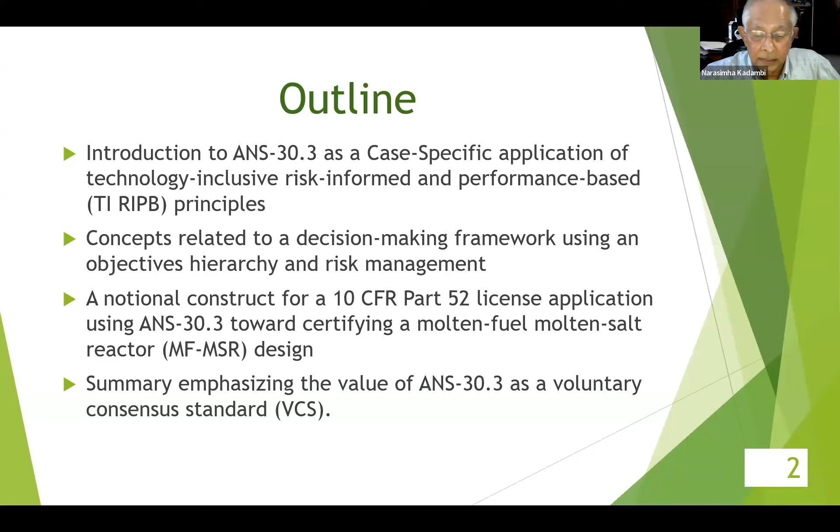So ANS 30.3 is a voluntary consensus standard in the traditional sense that it has requirements. What is different is that the requirements in the standard are explicitly risk-informed and performance-based. And this distinguishes it in terms of applying it to light water reactors and especially new light water reactors.

This slide shows where these requirements are identified in the standard. They occur primarily in the sections shown at the bottom of the slide. But the emphasis is that this offers requirements that are considered to be a minimum set for each of the topic areas covered in the standard, and are to be applied through the whole design development process and phase.

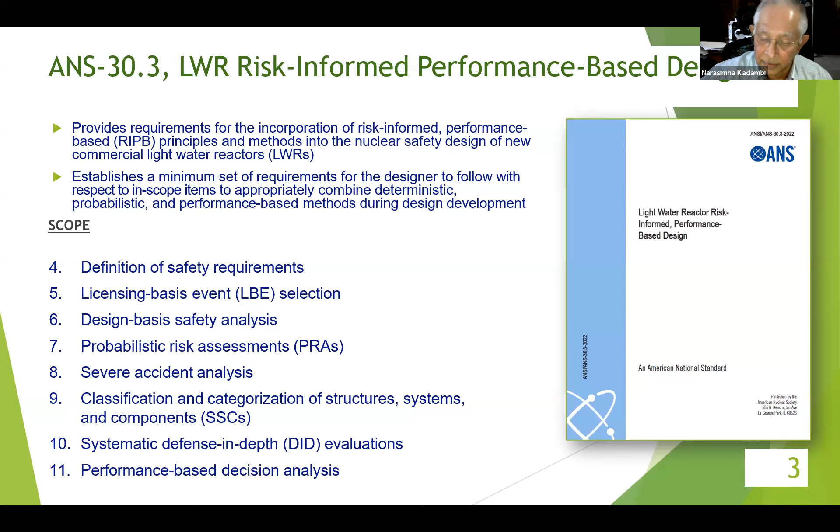So a key requirement of ANS 30.3 is that the user establish a decision analysis process. So why is that needed? Well, that's what it takes to identify technical alternatives, identify and evaluate alternative courses of action, record the preferences that are expressed in the various decisions that are taken, document the decision rationale and the assumptions that go into the decisions. So all this is spelled out in section 11 of the standard, performance-based decision making.

Now, the other sections are then implemented towards achieving nuclear licensing success based on this process that has been set up.

The decisions associated with use of the standard occur at various levels. The requirements are not all considered to be at the same level, but they occur at the project level, covering unique technologies of the project, the plant level design features, the site characteristics, and the whole project as a whole. The plant level design features would be a subset representing the nuclear steam supply system, the secondary side systems, the support systems, etc.

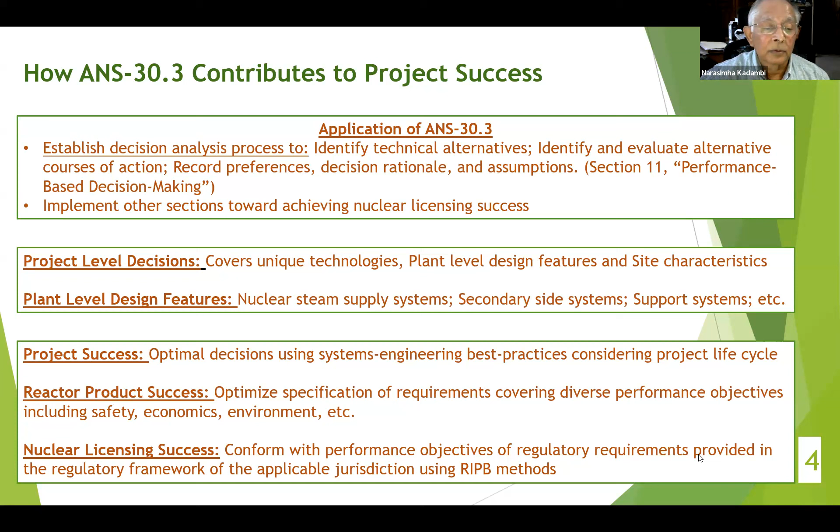A part of this project is the reactor product that is the central feature of this project. The reactor product itself is something where the requirements would optimize diverse performance objectives, including safety, economics, environment, etc. But in terms of the specific requirements in the standard, we are aiming for a subset directed towards nuclear licensing success. So what we are talking about is a flow down where you begin at the project level, go down to the plant level, then to the reactor product, and then to the licensing itself.

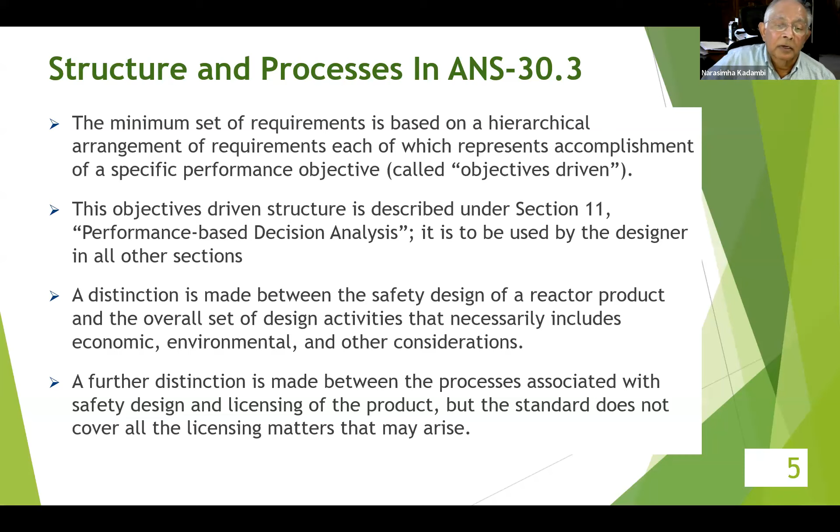The idea expressed here is that the regulations themselves offer plenty of flexibility. The current LWR licensing process used for the operating plants, the operating fleet, has demonstrated high levels of safety. But the way the regulations have been implemented, the general feeling is that it doesn't necessarily offer all that much flexibility.

I suggest that's because the way regulatory practice has evolved has made the implementation of the regulations really rather prescriptive. I think, as a result of a lot of rethinking about the effectiveness of our current regulatory framework, and the growing recognition of RIPB approaches, it is clear that for a lot of things now valued with the operating fleet, such as power uprates, license renewal, life extension, these RIPB approaches can offer significant economic benefits. In fact, last year in August of 2023, Lana Lawrence of INL made a presentation identifying such opportunities. But really, the flexibility of the regulations, I think, can be used to maximum benefit with respect to non-light water reactor applications using regulatory modernization.

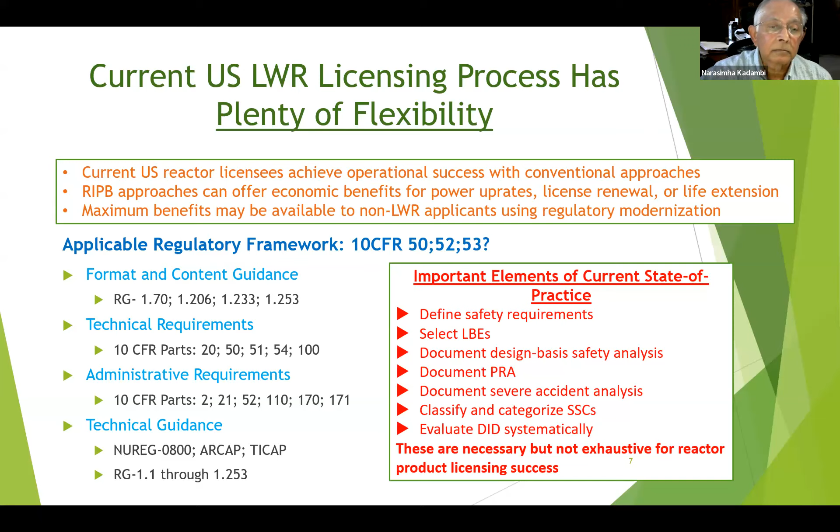The regulations themselves can be looked at in terms of the outcomes that they aim to accomplish. So one can look at the technology-inclusive outcome objectives for the licensing process. For example, implementing 10 CFR Part 50, right in the introduction, it says that the general design criteria are generally considered applicable to other types of nuclear power units.

And it was looked at that way at the beginning, but it evolved into being rather prescriptive in a number of areas. Now more recently...

The commission, as part of its reform process, issued a white paper, that is the SRM to SECY-98-144, where it directed the staff to consider risk-informed performance-based approaches and identified the high-level outcome objectives associated with success in implementing these approaches.

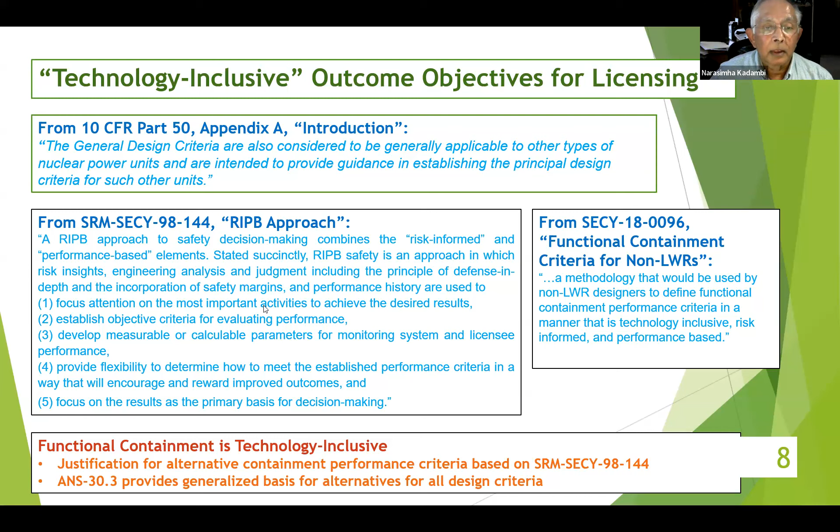Let's see, at this point I don't know if Kent Welter is on the line. I'm moving on to the next phase of this, but if Kent is on, I'd like to see if he has anything to say. Kent is the chair of the ANS 30.3 working group. As I say, I've prepared these slides representing the standard, and I'd like to give him an opportunity if he has any comments. But, okay, in terms of the questions in the chat, I'll try to get to them at the end.

Okay, moving on to the next segment of the presentation. This generalized architecture that I'm trying to describe offers requirements management using the objectives hierarchy concept. The requirements management part is really important because it's the process of documenting, analyzing, tracking, and verifying requirements, and that's a key part of implementing a systems engineering process.

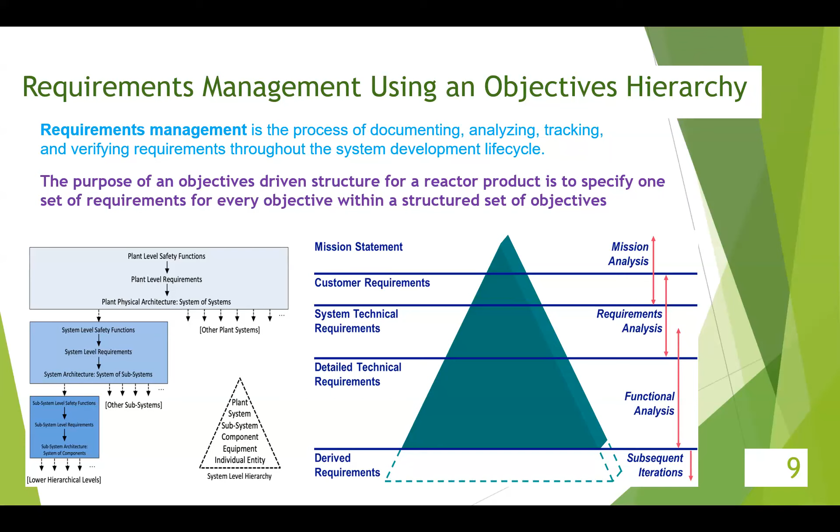Next slide. So the idea of having this hierarchy actually implies another factor that quite frequently is not very explicitly stated, and that is that there is a difference in the level of detail associated with the performance objectives in a requirements hierarchy. So this kind of structure of performance objectives is what I would call a framework.

And this is the decision-making framework that's an integral part of ANS-30.3. I would call any framework to be a representation of the relationships and dependencies among the specified elements. And in this case, what we are talking about are the performance objectives, representing the various aspects of the project and incorporated into this formal decision analysis process.

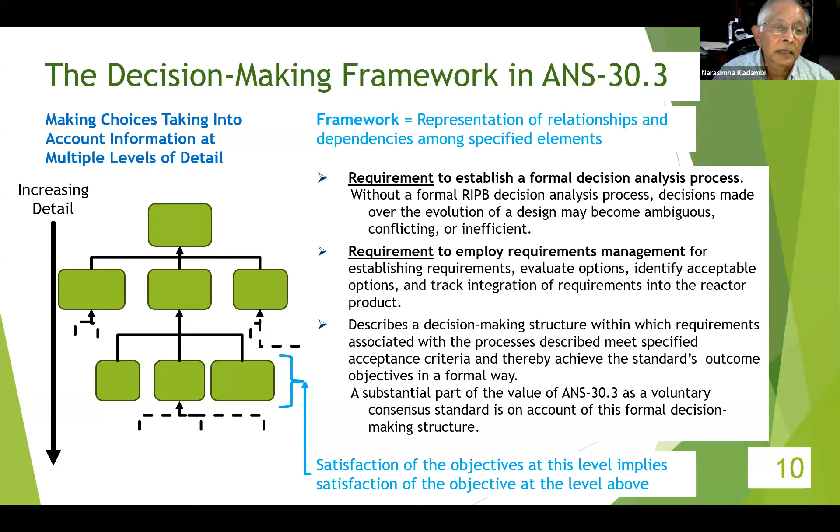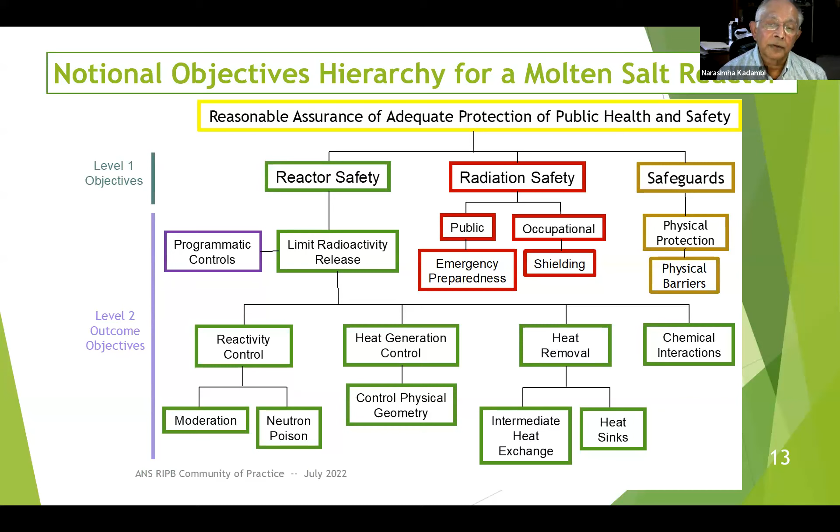This is just showing how the various elements of the framework we've been talking about can offer requirements to each of the boxes shown here, so that you can accomplish the higher level objectives of reactor safety, radiation safety, and safeguards. This can be done in a formal way and demonstrated for purposes of a safety case.

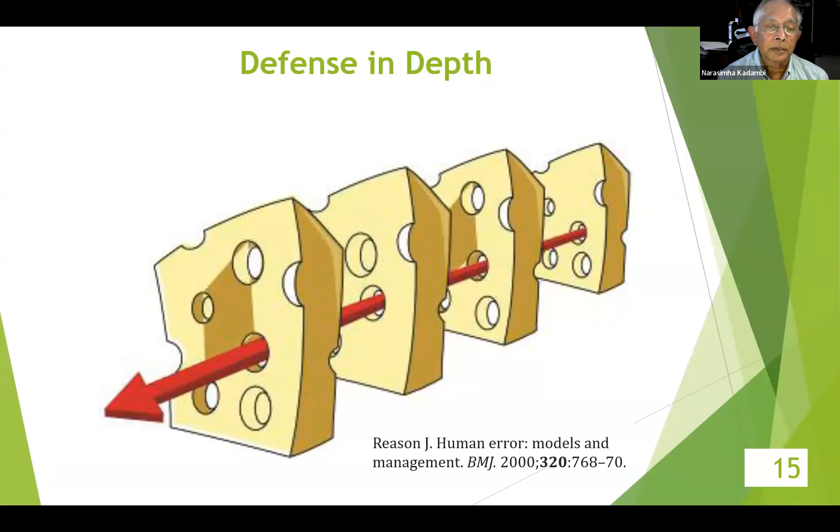Next slide. So this is again a pictorial of defense in depth. This has been used before, but the basic idea is that these levels of defense, or layers of defense, can be addressed using the structure provided in ANS 30.3. Next slide.

So in summary, ANSI ANS 30.3 is a voluntary consensus standard, and it is really able to address many significant needs relative to non-LWR applications, and can be used in the same way that many other standards developed by other standards developing organizations are used. It provides the architecture for a decision-making framework, and it can address input information at various levels of detail, depending on whether you're at the conceptual level or more mature design levels.

Now, the decision-making structures are connected, and I use the analogy of scaffolding to connect all the various pieces in a formal way, and keep track of all the decisions taken throughout the life of the project. As part of the performance-based approach, you can take account of the physical and temporal margins available to accomplish the performance objectives. The last point is that ANS 30.3 can really be a factor in claiming that progress has been made towards meeting the Nuclear Energy Innovation and Modernization Act, as well as the federal direction, with respect to using voluntary consensus standards in a performance-based manner.

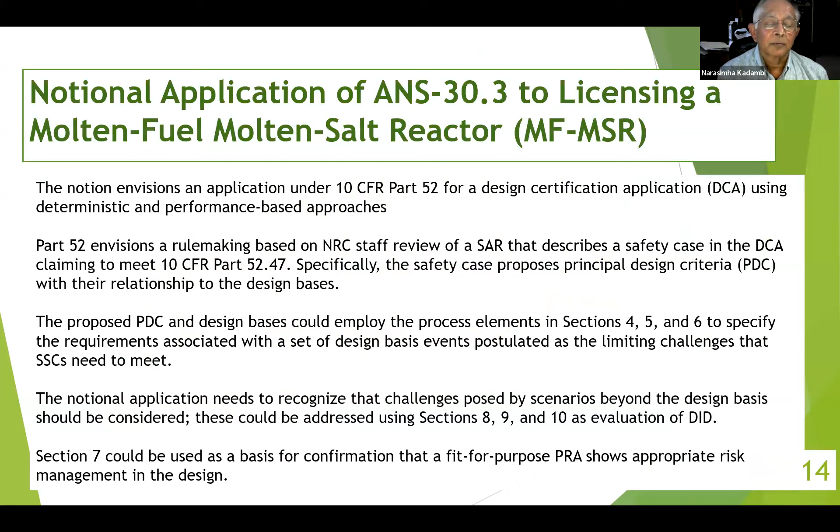I'm suggesting that the precedent set in the functional containment area is a basis for saying that one can make the arguments for adequate safety margin for any of the regulations where the performance criterion is identified clearly. The whole idea is to break down compliance into what it takes to meet the performance objective, rather than either the regulatory practice or specific wording open to interpretation, such as 'important to safety' or 'safety related.' These terms have such a wide range of interpretation that I think it makes more sense to present the performance objective and make a solid safety case for accomplishing the objective. What it takes is you state your claim, present your arguments, and offer the evidence that you're accomplishing what you claim you can accomplish. In that kind of formal framework, the NRC would be quite receptive to using a performance-based approach. I hope I answered the question.

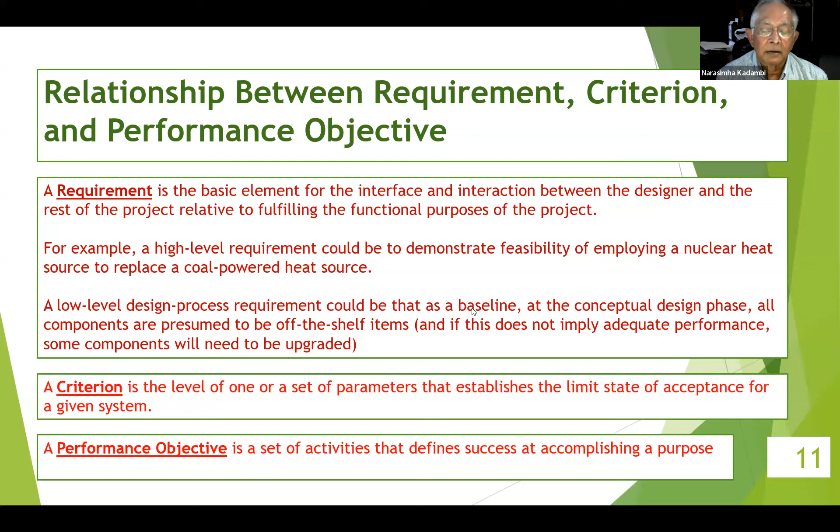In Part 52, what is called ITAAC, the inspection test acceptance criteria - that acceptance criterion is based on having a performance objective, and I'm suggesting that the line on the next slide, slide 12, that performance criterion is what you have set in your ITAC. That's the connection I'm making to the regulation. Brandon, I hope that answers the question.

We're going to go on to the question by Frank Hope. He asked if you can explain how NRC endorsement of ANS-30.3 would help an existing licensee.

I would refer you to Lana Lawrence's community of practice presentation in August of 2023, rather than go through it. I think she has explained a lot about how risk-informed, performance-based approaches can be used by operating reactors.

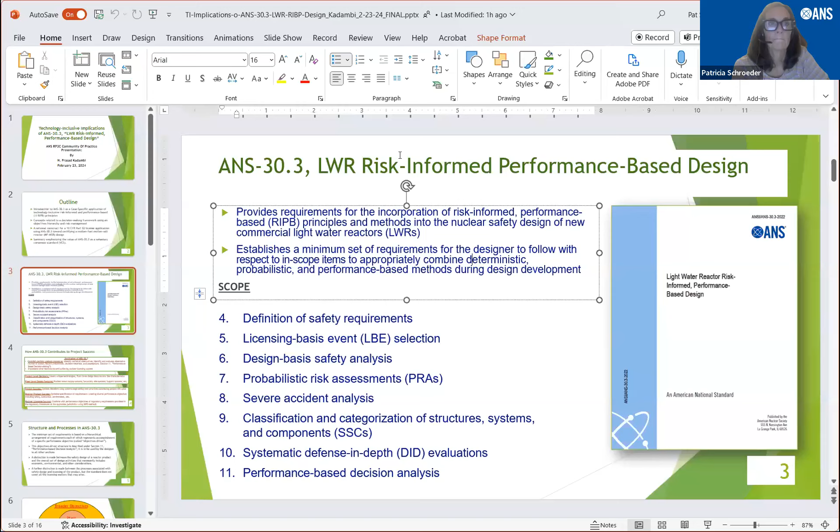For non-LWRs, NEI 1804 has been endorsed by Reg Guide 1.233 for the RIPB approach to inform the licensing basis of a plant design. Basically, Ian, I'm saying that Reg Guide 1.233 endorses a wide range of risk-informed performance-based approaches, and NEI 1804 is one specific one that it endorses. But what we have requested NRC staff to do in reviewing ANS 30.3 is to make ANS 30.3 one of the references for Reg Guide 1.233, and that would enable the technology-inclusive aspects of 30.3 to be employed for each of the different sections that Reg Guide 1.233 covers.

Does that answer your question, Ian? I see your point, but I think that clarifies what you're thinking there, and I appreciate it.